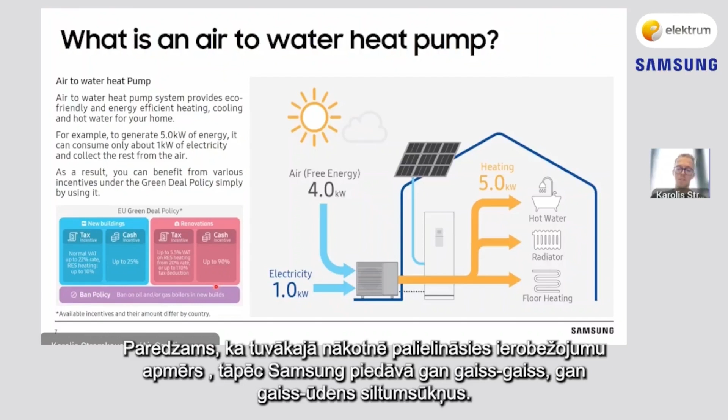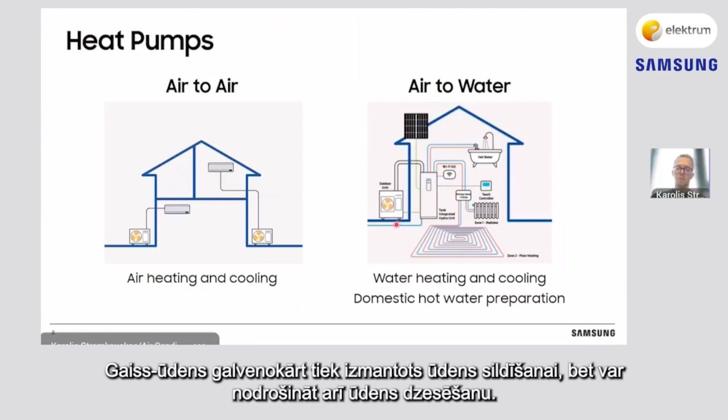Samsung offers both air-to-air and air-to-water heat pumps. Air-to-air units can both provide heating and cooling depending on your needs, while air-to-water units prepare hot domestic water for household consumption. Air-to-water is primarily used for heating and water heating, but can also provide water cooling.

Let's first look into the air-to-water heat pump, as this is the most popular option for heating. We have a wide range of air-to-water heat pumps available. We can offer mono, split, and TDM Plus products, which can be combined with a hydro unit and a third-party domestic hot water tank.

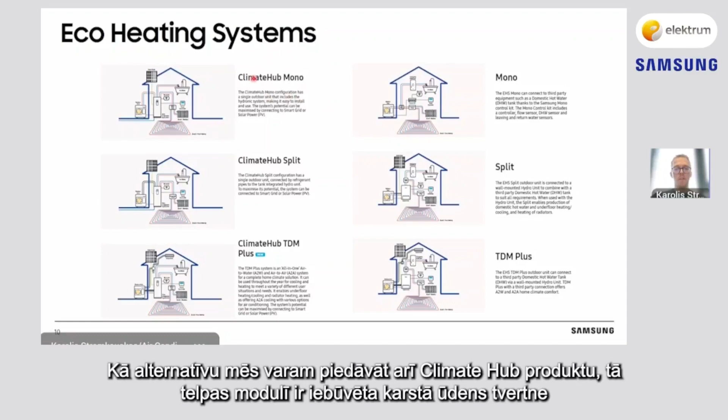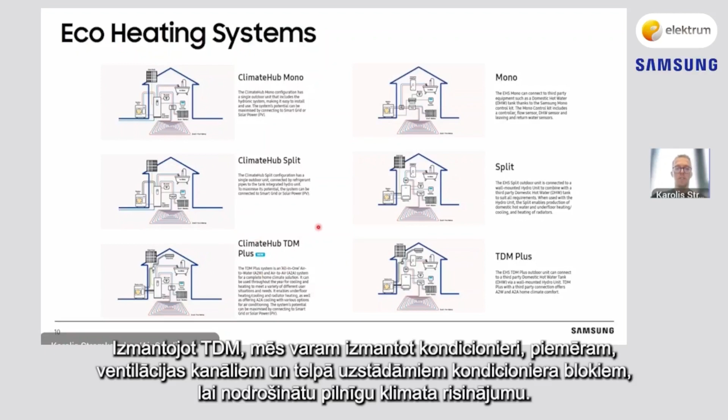Alternatively, we can also offer a climate hub, which serves as a tank-integrated hydro unit with capacity of 200 and 260 liters to choose from. With TDM, we can also connect to our air conditioners such as ducts and wall mounts for a full climate solution. EHS products can also be combined with solar panels for higher efficiency.

We also have many awards and certifications. All of our products are certified. The EHS and Climate Hub are also certified by Keymark, and our newest released Mono HT of last year has a Quiet Mark certification for its low noise.

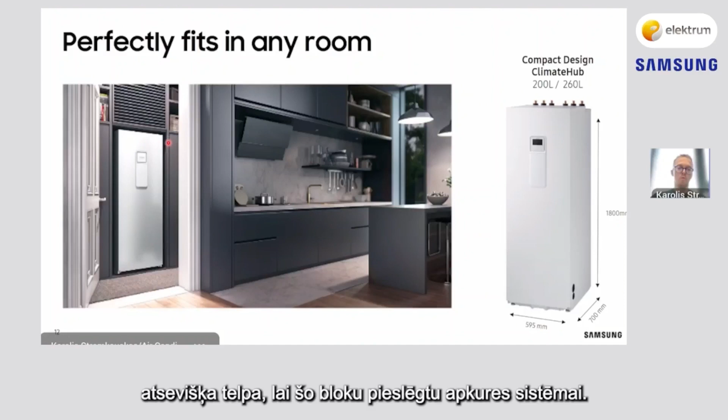Here you can also see our tank integrated hydro unit that looks like a refrigerator really, and can blend into the environment quite easily. It only requires a minimum amount of space and does not have to have a dedicated room for the heating system entirely. Here is our mono HT, or high temperature unit, that is used for house renovations.

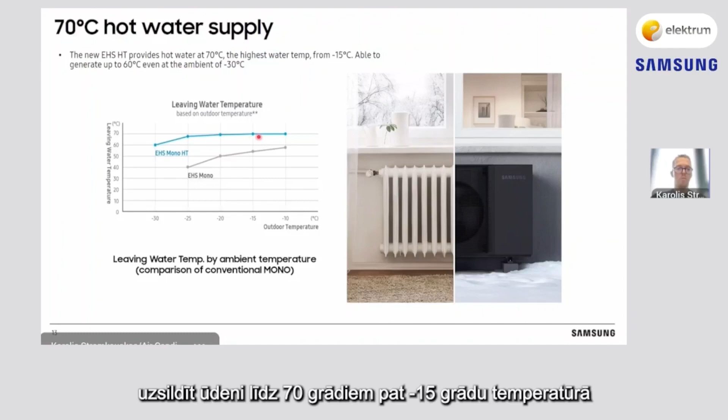Compared to alternatives, it has a nice premium design with matte black finish. Besides the aesthetic, it can supply hot water of up to 70 degrees Celsius without an electric heater. As you can see in the example, compared to a regular EHS mono, the mono HT can already generate leaving water temperature of 70 degrees at outdoor temperature of -15 and maintain a similar level all the way to -25. At -30, it can still generate water temperature of 60 degrees Celsius, maintaining quite consistent temperature.

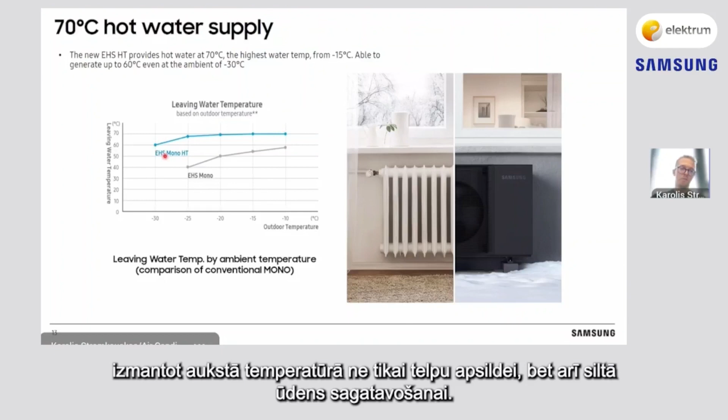To also debunk one myth, an air-to-water heat pump is not necessarily used only at cold temperature, and not necessarily used only for floor heating. The mono HT can also maintain high heating capacity at low temperatures compared to conventional models. Even at -25 degrees, the mono HT heating capacity remains at 100%, while the conventional model drops to just above 60%. Note that an electric heater is also not needed to maintain 100% heating capacity with mono HT, which is quite nice.

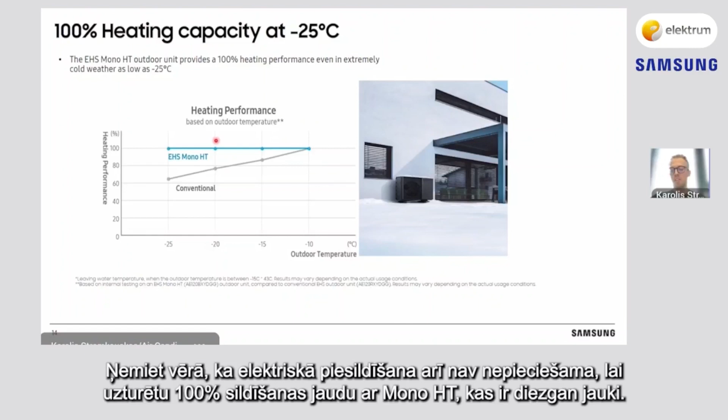All of our EHS units have a 4-step quiet mode. What's different with mono HT is that we can get a sound as low as 35 decibels, the sound of sleep. So you don't necessarily hear it at nighttime when you're sleeping. It is quite comfortable.

It is also important to understand, when it comes to efficiency, how manufacturers present their product efficiency levels. As you can see in the example of air-to-air heat pump here, energy labeling, the other manufacturer's efficiency compared to Samsung's is drastically different, with SCOP of 3.4 for other manufacturers compared to Samsung's 4 at colder climates in Northern Europe region. However, both are labeled A+++.

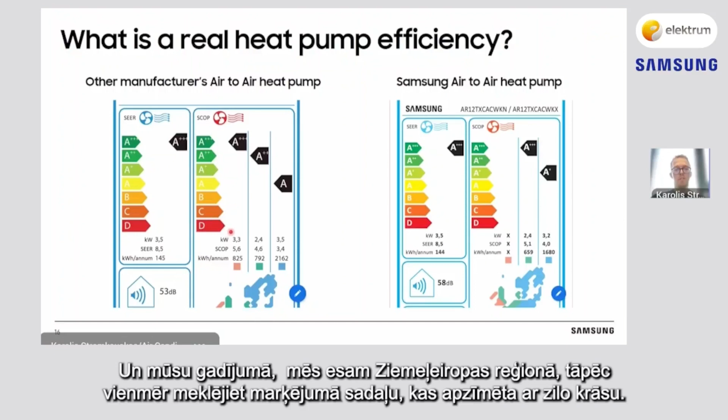Why is that? For air-to-air heat pumps, Samsung takes Central European efficiency numbers when labeling their products, as seen in green here. In comparison, some manufacturers may take Southern European efficiency numbers for a better energy labeling presentation, as seen here with the red color. So it is very important to check for your specific region for real efficiency results. In our case, we are classified in Northern European regions, so always look for the blue color.

Let's look at an example of heat pump consumption, starting with a new, well-insulated house of A+ rating. This house uses both floor heating of 35 degrees and domestic hot water from a tank of 50 degrees, with 50 liters per day per person, or 200 liters for 4 people. The heating demand in this case would be around 9,500 kilowatt-hours, and domestic hot water demand is around 5,000 kilowatt-hours.

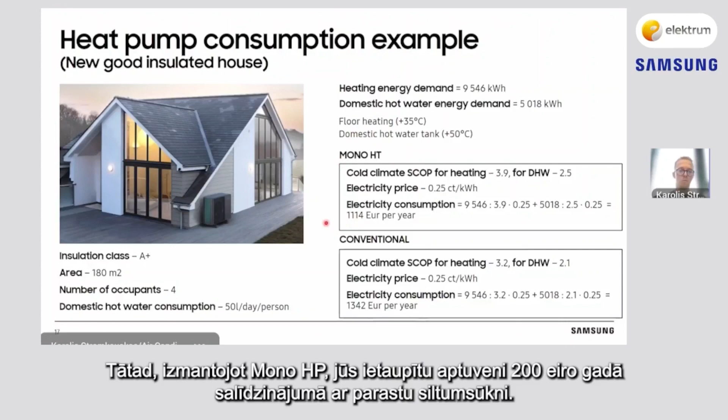Taking the SCOP coefficient into account, the electricity consumption for a mono HT would be 1,114 euros per year, compared to a conventional heating system at 1,342 euros per year. So by using a mono HT, you would save roughly 200 euros compared to a regular heat pump.

Now let's take a look at heat pump consumption for a badly insulated house. In this case, we would use radiator heating of 50 degrees, a higher temperature, and domestic hot water consumption of also 50 degrees. The heating demand is much larger in this case, of course, at 28,110 kilowatt-hours, and domestic hot water demand is around 5,000 kilowatt-hours. As you can see from the SCOP, it would be much lower due to the increase in temperature needed of 50 degrees Celsius, which also leads to higher energy demand.

The electricity consumption in this case for a mono HT would be 2,858 euros per year, compared to a conventional heating system of 3,959 euros per year. In this case, you would save much more with the mono HT, with over 1,000 euros saved per year.

In conclusion, what we can say is that the heat pump is always more efficient when producing lower water temperature. For old houses, because of the high heating demand and higher needed water temperature, the consumption can be very high, especially when installers put a simple heat pump into an old house which cannot provide a high enough temperature, resulting in higher electricity use and huge consumption as a result.

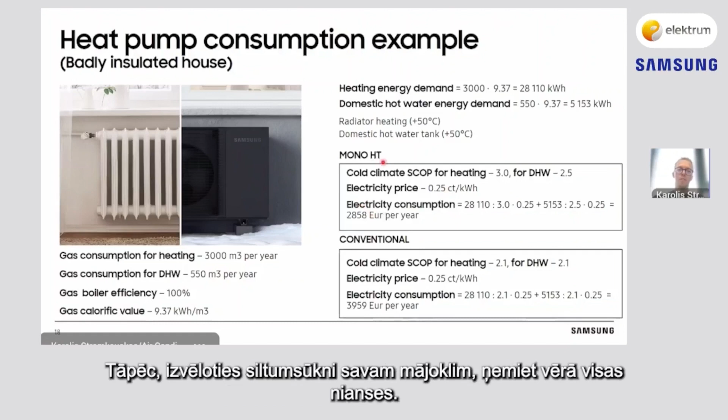But if you use an appropriate heat pump, such as the Mono HT, that can produce higher temperatures, you can still get much better results than when you're having a conventional heat pump. And at Samsung, we really evaluate each house individually for each heating demand required.

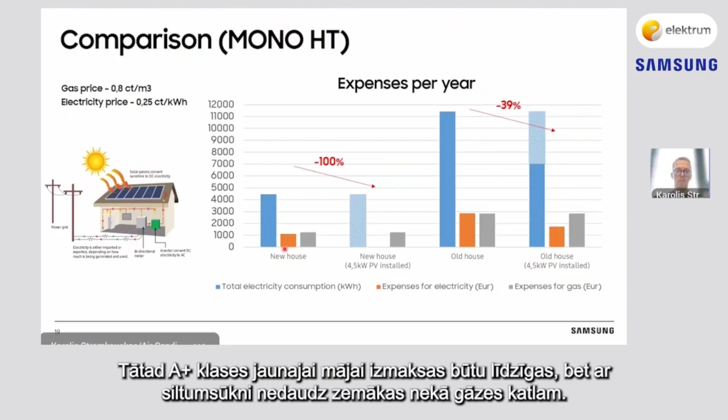Here you can see the general expenses per year when using electricity with Mono HT in comparison to gas usage. So for an A-type, A+ type new house, the cost would be similar, but slightly lower for Mono HT compared to a gas boiler. But if you pair the Mono HT with photovoltaic, you would reduce this expense to zero by taking energy from the sun.

Now, when compared to a badly insulated house, the electricity expense would be the same as gas boilers. But pairing again with a solar panel of 4.5 kilowatts, it would reduce that expense by minus 39%.

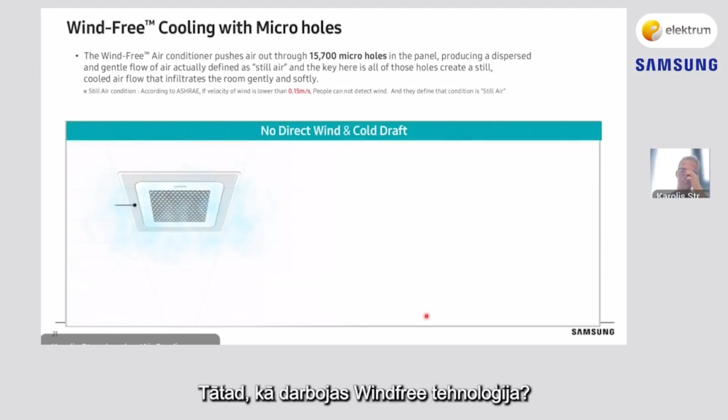Since we've touched upon the air-to-water heat pumps, let's now move to air-to-air solutions by talking about our wind-free technology, offered for both our air-to-air heat pumps and our air conditioners. So how does wind-free technology work? Our wind-free product panels come equipped with 15,700 microholes through which air is gently dispersed throughout the area without any direct wind from the air outlet, so we eliminate the experience of cold drafts.

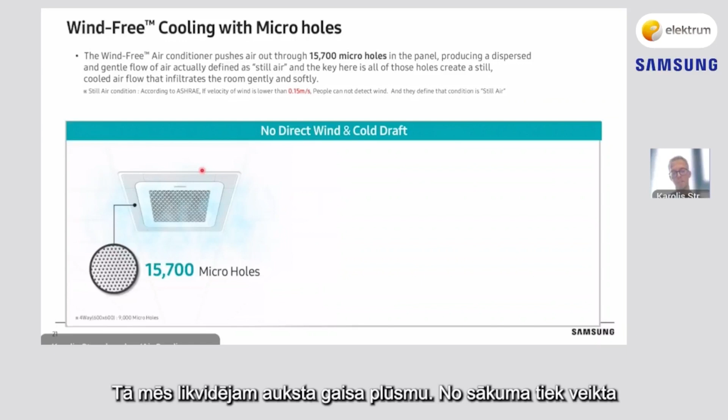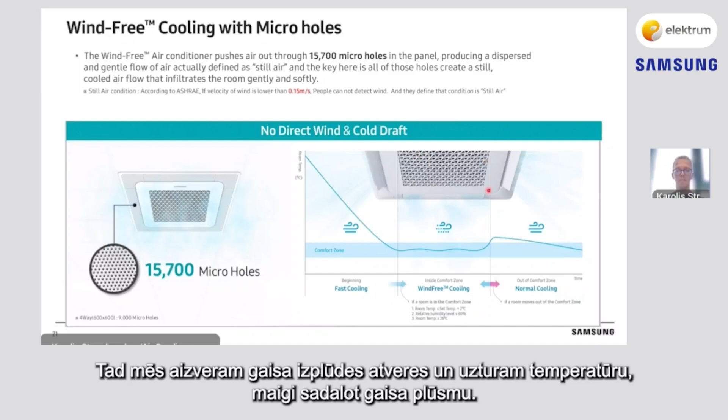First, we start with fast cooling to reach the wanted temperature levels. Then we close the air outlets and maintain that temperature by gently distributing air across the room. This is similar to how we water plants with a shower head, providing water evenly, dispersing it throughout the leaves, as opposed to using just a hose, which saturates in one direction. This is also similar to how conventional air conditioners work—they just blow into a single direction and don't disperse the air throughout the area.

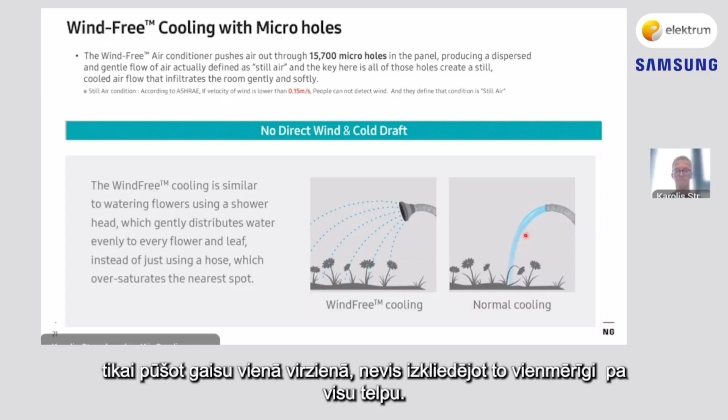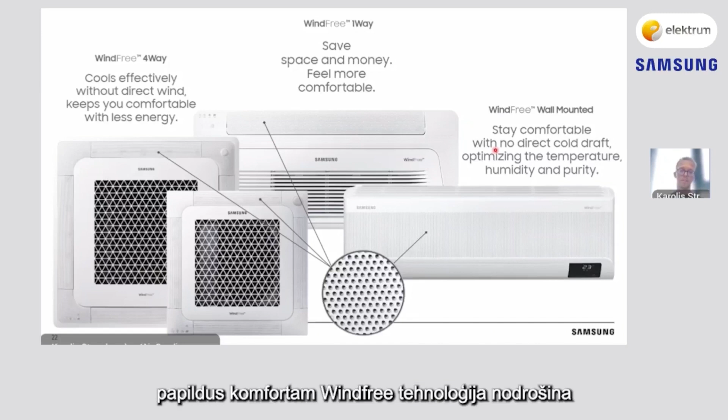Our wind-free technology is available for multiple products, such as the wall mount, the small and large 4-way cassettes, and also 1-way cassettes. In addition to comfort, wind-free technology also uses less energy while maintaining the set temperature levels. We're proud to say that we're the only ones in the market that have air conditioners and air heat pumps that can cool with still air, and this is a patented technology by us.

As you can see in the diagram, a general 4-way cassette doesn't evenly distribute temperature compared to the even distribution of Samsung's 4-way wind-free cassette. According to studies, wind-free technology reduced the level of discomfort for users by at least 48% compared to a regular air conditioner, so it does provide a lot of comfort.

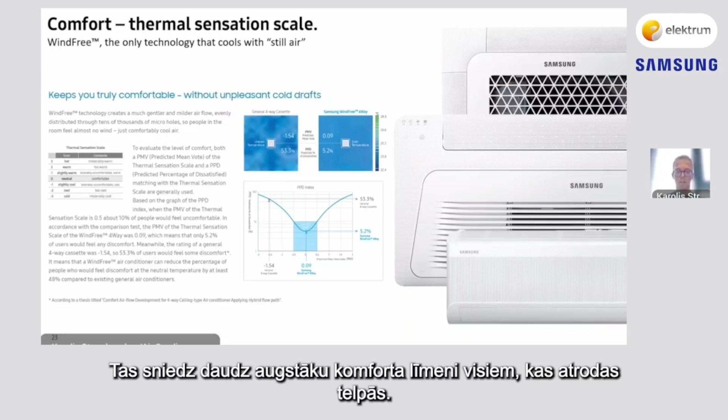Moving forward. Yeah, just a slow delay.

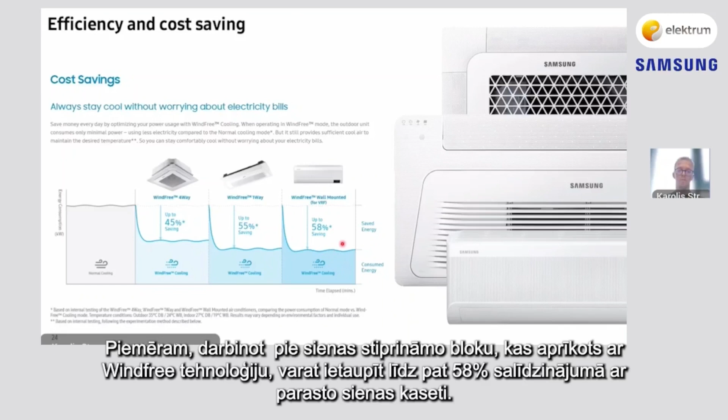As mentioned before, wind-free technology helps save energy, and it consequently also saves costs. This is done by making sure the outdoor unit is consuming only the minimum required energy when operating at the wind-free function. For example, using a wind-free wall mount leads to up to 58% savings compared to a regular wall mount, and similar examples can be seen with 1-way and 4-way cassettes.

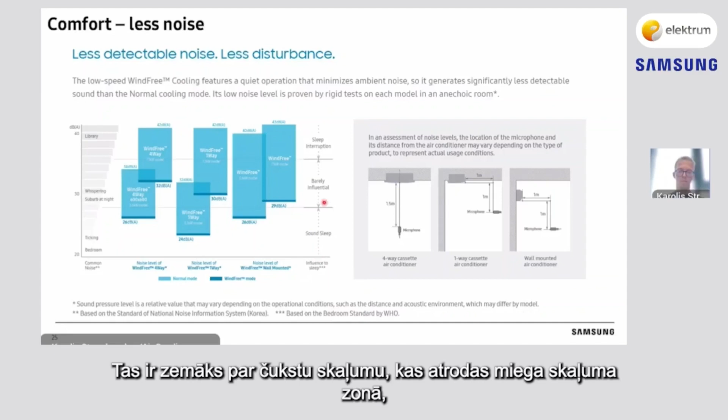One of our most important benefits is the reduction of noise. Wind-free products operate in a quiet mode, showing a very minimal decibel level when maintaining temperature. Tests show that when wind-free mode is activated, the noise is barely noticeable, being lower than the sound of a whisper, with the sound being in the sound-of-sleep zone, making sure that comfort is maintained during night hours when you're sleeping.

And we are not the only ones thinking that this is an innovative technology. It has achieved numerous awards for its design, its technology, and its user satisfaction. For instance, it received the iF Design Award in 2017 when it came out, and the Best Innovative Award by Febrava. So it goes to show that it is a proven technology, proven innovation in the market itself.

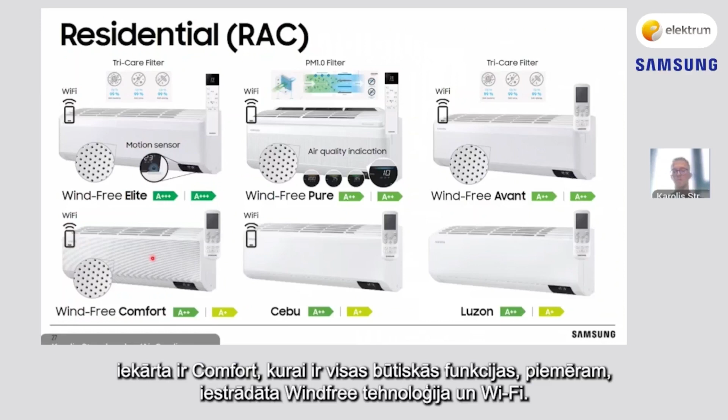Here we can see our residential wall mount unit lineup. We have 4 wall mounts with wind-free function: the Elite, the Avant, the Pure, and the Comfort. The Elite is the most efficient unit we have, with an installed motion sensor. The Pure is mostly focused on maintaining air quality, and our most popular unit is the Comfort, which has all the essential features such as wind-free and integrated Wi-Fi. We also have cheaper alternatives such as Cebu and Luzon.

And now we move to the Nordic RAC, which is just like the regular residential wall mount, just with a focus on heating, serving as an air-to-air heat pump instead.

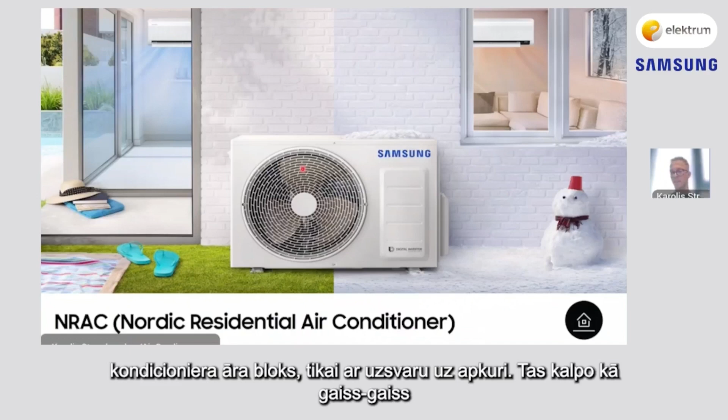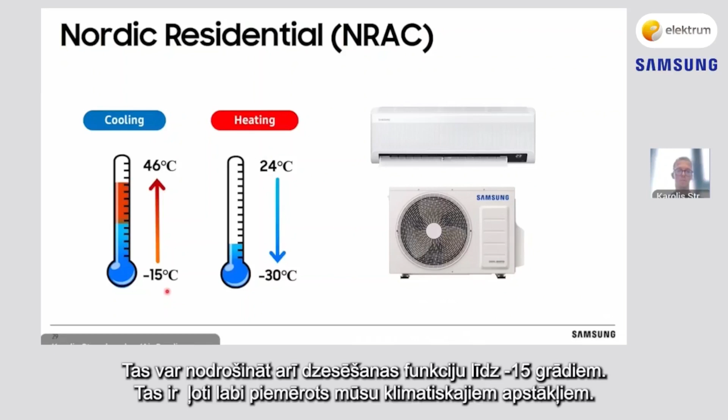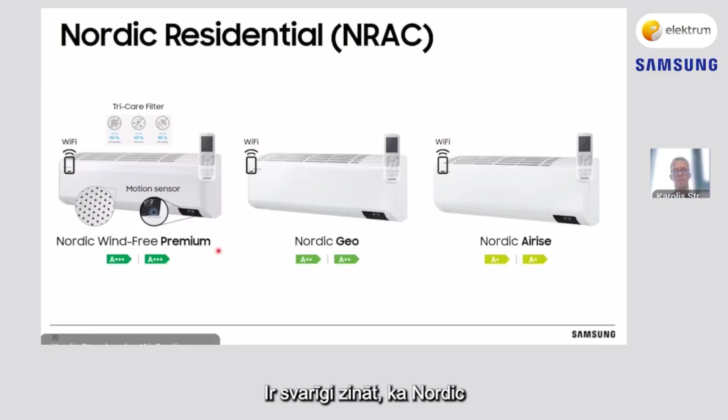The Nordic RAC unit can work in outdoor temperatures of up to -30 degrees, and can also cool in outdoor temperatures of up to -15, so it is really catered to our climate. Here are the three distinct products: the Nordic wind-free, the Geo, and the Airise. The difference is in performance and efficiency levels, but also the Nordic wind-free has the wind-free function. Nordic RAC units are only available in Scandinavia and the Baltic regions due to the colder climate, so it's really nice that we managed to get these units into this market.

Now moving to SmartThings. We at Samsung see connectivity as key to our product offering, and Samsung owns SmartThings through which you can control a multitude of devices all through your phone via the SmartThings application. SmartThings is a very cool feature through which you can wirelessly connect to over 1,500 devices with a range of brands such as Google Assistant, Bose, Philips, IKEA, and so on.

You can also connect to other applications besides air conditioners, such as thermostats, light bulbs, TVs, refrigerators, washers, speakers, making things easier and faster for the end user. Essentially, it creates an ecosystem for a smart house, so that everything is at the tip of your touch through your phone.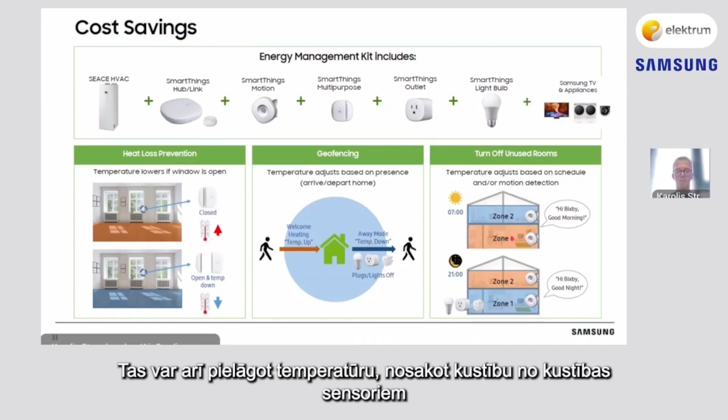One key benefit of SmartThings when it comes to air conditioning and heat pumps is cost savings. By utilizing the energy management kit, you can prevent heat loss, lowering temperature when windows are open and increasing it when windows are closed. Temperature can also be adjusted based on whether you're at home or not, so it can be increased on your way home and reduced on your way to work. It can also adjust temperature by detecting motion and turn off unused rooms completely via Bixby, also a feature of Samsung's.

Via SmartThings, you can gather really important energy consumption and cost insights. You can measure the energy levels used, and it can also estimate cost for all of your devices. It can report usage patterns and help you save energy by operating more efficiently, checking the patterns and adjusting accordingly.

Now we'll look at what the future outlook will look like in the heating market and for Samsung in general.

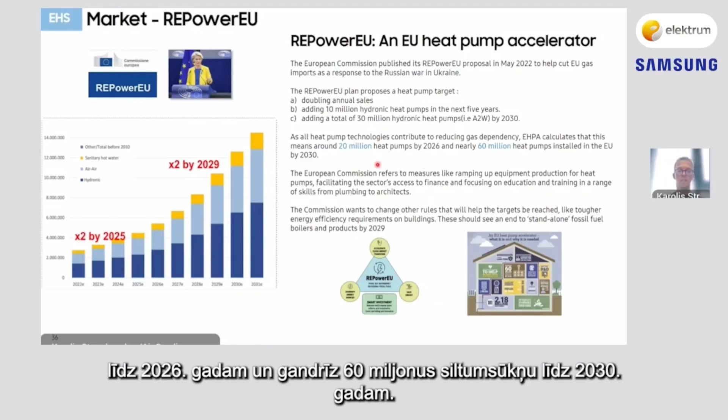The European Commission published a proposal to cut EU gas dependency in response to the Russian war in Ukraine. The goal is to have around 20 million heat pumps installed by 2026 and nearly 60 million heat pumps by 2030. This would mean an end to fossil fuels and fossil boilers as we know them, and a quadruple market increase by 2029.

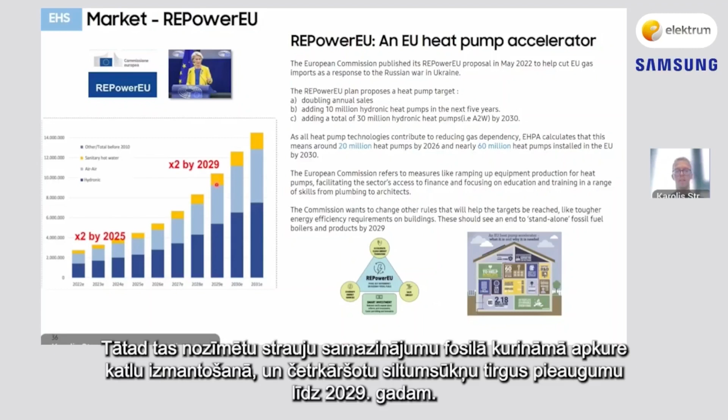Samsung primarily uses R32 refrigerant in its air conditioners and heat pumps. As you can see, R32 is much more environmentally friendly, with lower global warming potential, charge ratio, and effective CO2 compared to R410A.

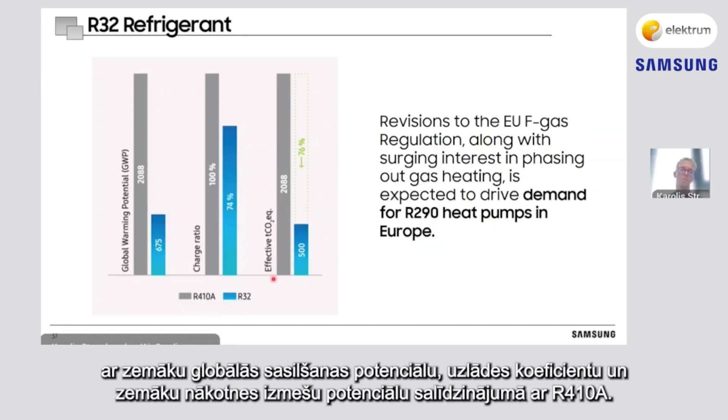However, our goal is to completely shift to R290 propane refrigerant, starting with our Mono launch this year. This is our new Mono R290 propane model at the ISH fair in Frankfurt this year. The Mono R290 is similar in design to the Mono HT with the gray color finish, so it's quite premium looking. This product will be even more ecological than what we currently have.

It is also expected to be available to purchase starting November.

Moving forward, when it comes to service after sales, we are also planning to launch our heating product EHS cloud service starting next year. It will be possible to remotely service the device without the physical presence of a service professional, and this will be a really big game changer in how we service our products.

At Samsung, we try to provide the best possible customer experience.